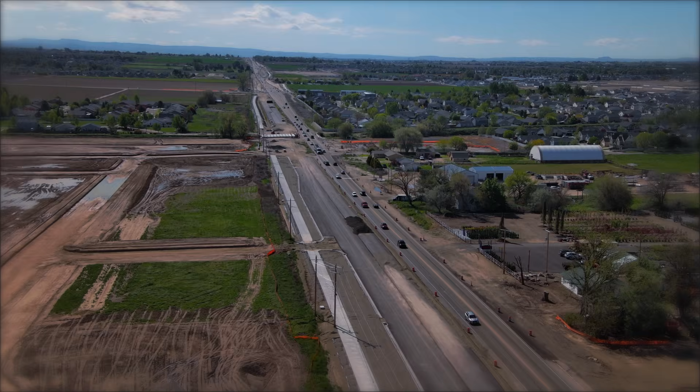Hello everyone, we're here again with another update for the State Highway 55 Farmway Road to Middleton Road project. I'm Justin, as always joining me is Jill, the Public Information Officer for District 3 of the Idaho Transportation Department. Hello again everyone, thank you for joining us.

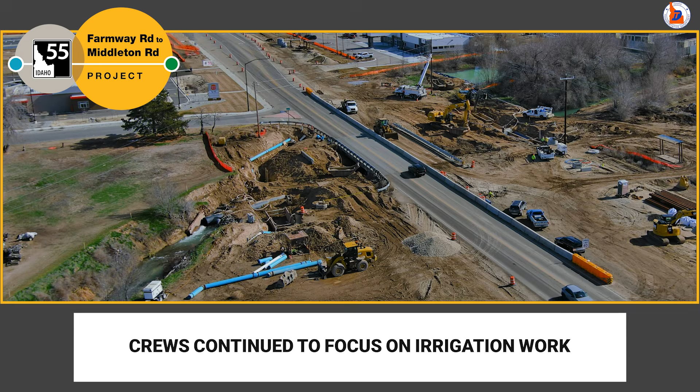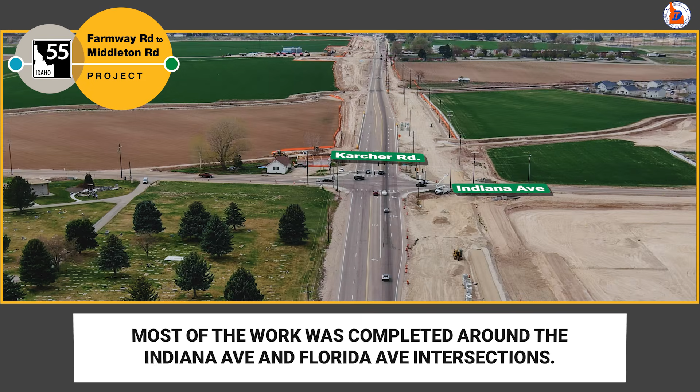Justin, what have we been working on since our last update? After our last update, we continue to focus on irrigation and underground utilities. We needed to get as much of it done before the water returned to the system and paving ramped up. Most of this work was done in and near the Indiana and Florida intersections. We also finished placing the first girders on both bridges in the project area.

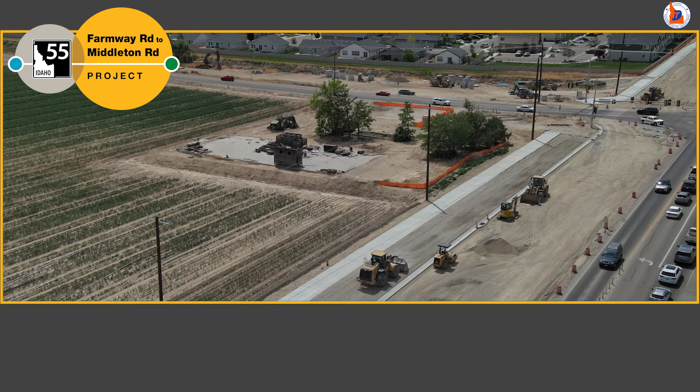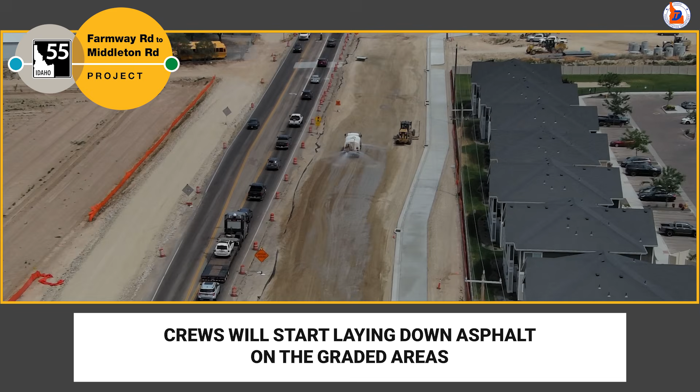So what about upcoming work, Justin? What can the public expect us to accomplish in the next 2 months, and how is that going to impact this traffic behind us? Crews continue grading on the sides of the highway to prepare for the paving. We have placed about 250,000 tons of dirt so far, with many more tons to move by the end of the project. Folks can expect to start seeing crews laying down asphalt on top of already graded areas. Paving will be completed at night, so impacts to the traffic in the daytime will be minimal.

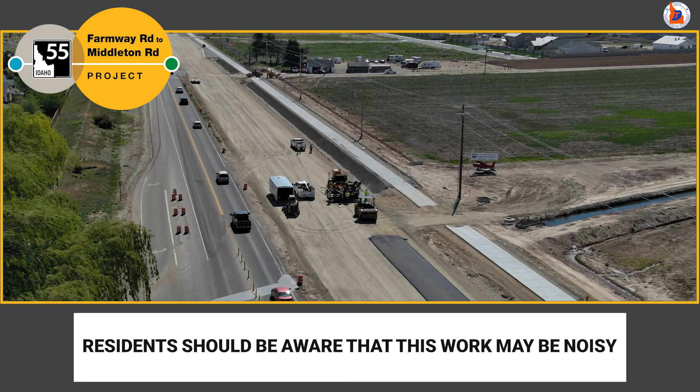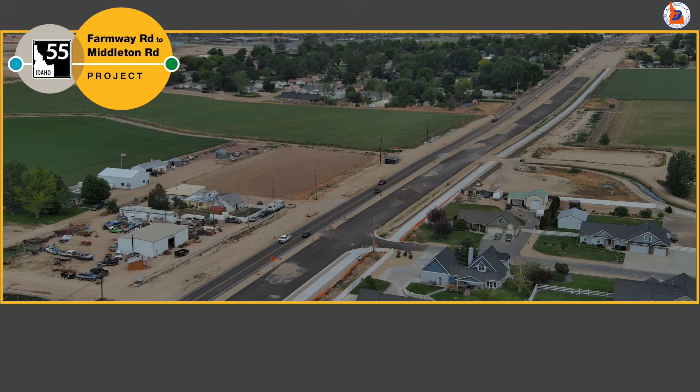But this work may be noisy. Residents of the area should be aware they might hear backup alarms and vibrations. People should also be prepared to see us remove some of the asphalt we've laid down. While this may seem like we are going backwards, some of the asphalt we place is only temporary, so we can get traffic off the parts of the road we need to work on.

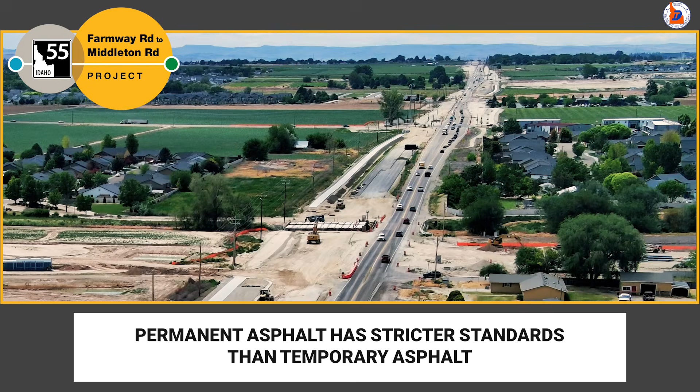So Justin, can you explain to me why that can't just stay and become part of the final highway? Well, temporary and permanent asphalt have different standards. While it allows us to keep traffic moving during construction, it lacks the durability of permanent asphalt. If we were to leave it in place, it would require continuous maintenance.

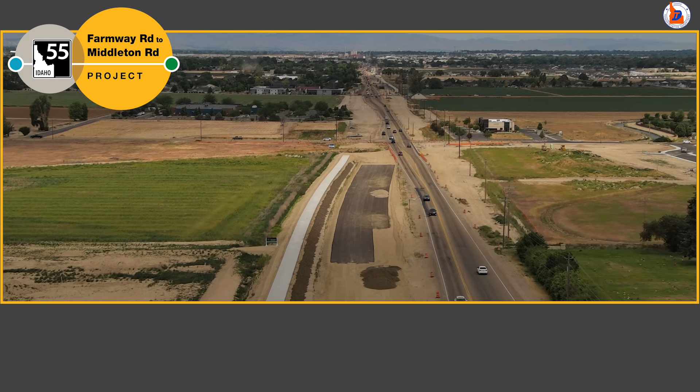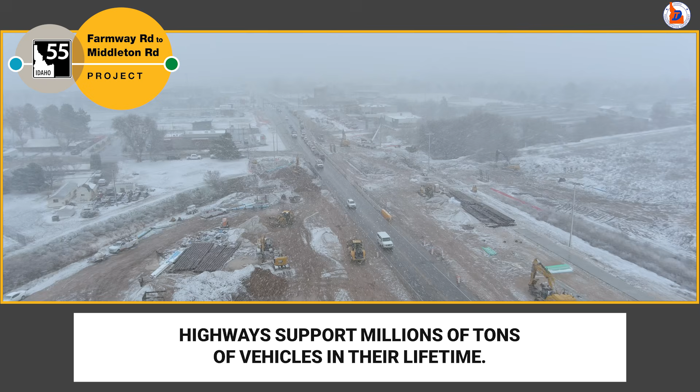So before our contractors are allowed to start permanent paving, they're required to pave a small area of permanent asphalt called a test strip. We conduct many tests on this strip to ensure the permanent asphalt meets ITD standards for pavement and will last a long time. Remember, our highways support millions of tons of vehicles in their lifetime through blistering heat, freezing cold, and everything in between. It is essential that our end product is strong and durable.

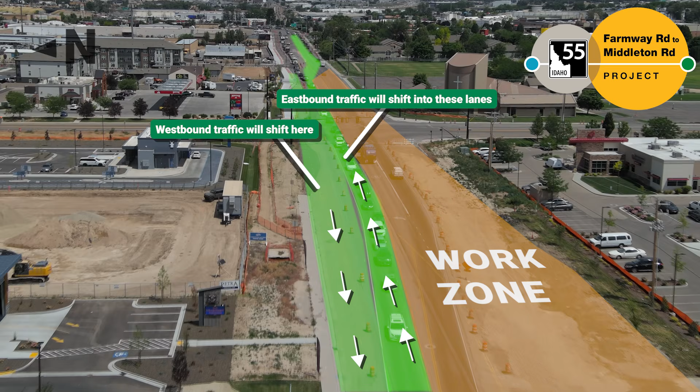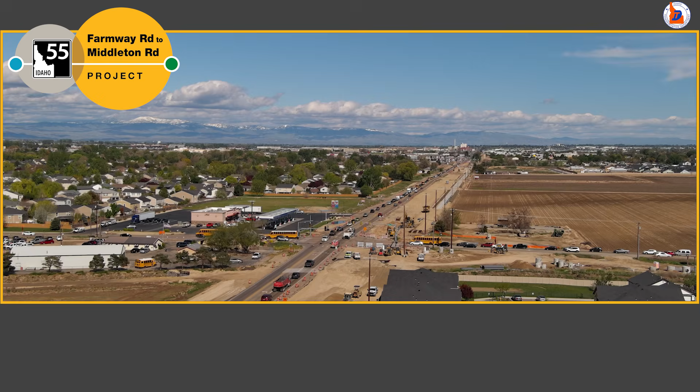The biggest impact to the traveling public will be the traffic shift plan for the Middleton intersections in mid-June, followed by Lake and Indiana. Traffic will shift back over to allow us to work on the south side of the road. Rebuilding an intersection while keeping traffic moving through it is very challenging, so we ask you, please slow down, pay attention to shifting traffic patterns, and follow directions from signs and flaggers. Safety is everyone's responsibility, and driving cautiously prevents property damage and, more importantly, saves lives.

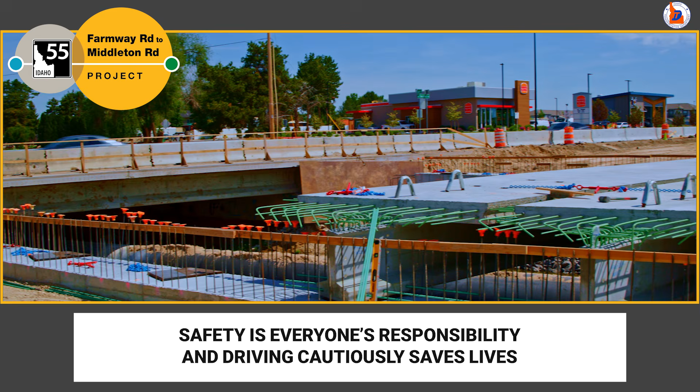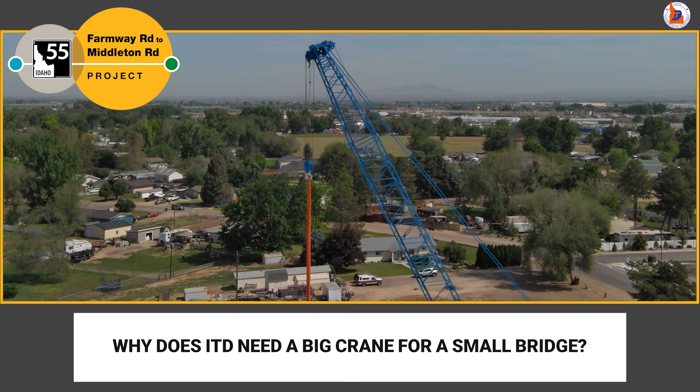Jill, do we have a viewer question this month? Of course. We had someone notice the big blue crane in the project area and asked us why such a big piece of equipment is needed for work on smaller sized bridges. That's a great question. The crane is being used to fly in girders. Girders are the horizontal structures that support the highway.

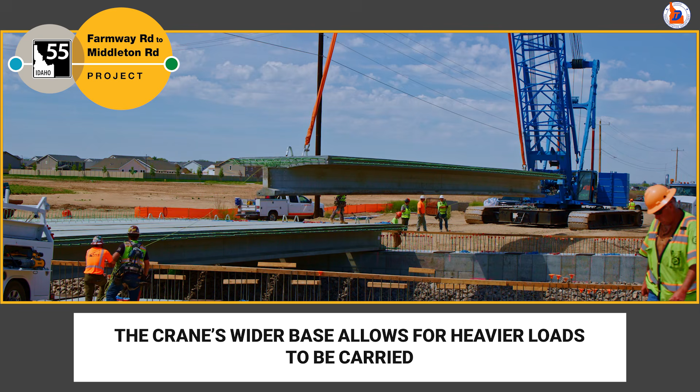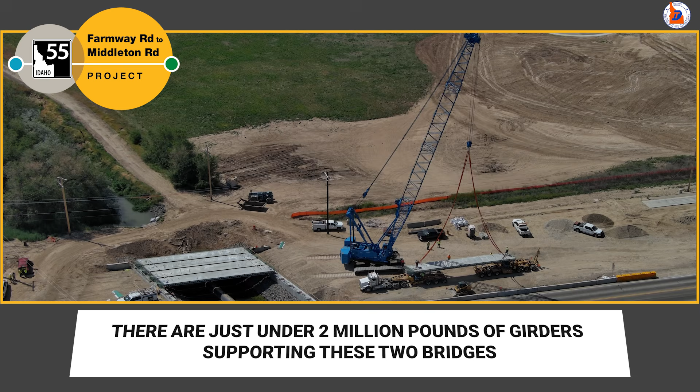Larger cranes have two benefits. First, the crane's wider base allows us to fly heavier loads. Each girder we use weighs in at about 97,630 pounds. There are 9 girders for the Eliza Bridge and 11 for the Wilson Drain Bridge. That's just under 2 million pounds of girders that will be supporting these bridges. These need to be strong enough to support the thousands of cars, trucks, and semis driving across them daily.

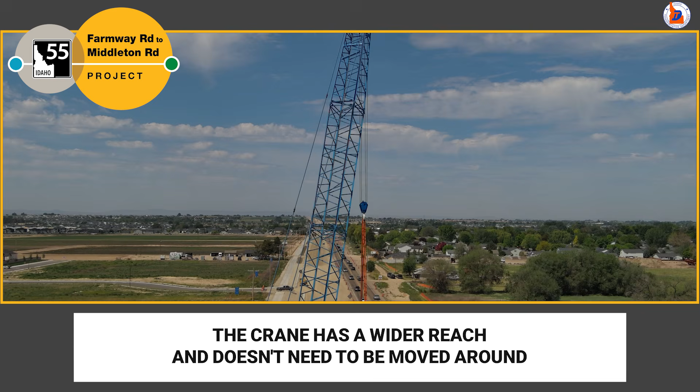Second, tall crane arms give us a wide radius in which the crane can work, eliminating the need to move it around. This allows us to stage girders further from the work area, minimize impacts to private property while also reducing impacts to traffic. Thank you, Justin.